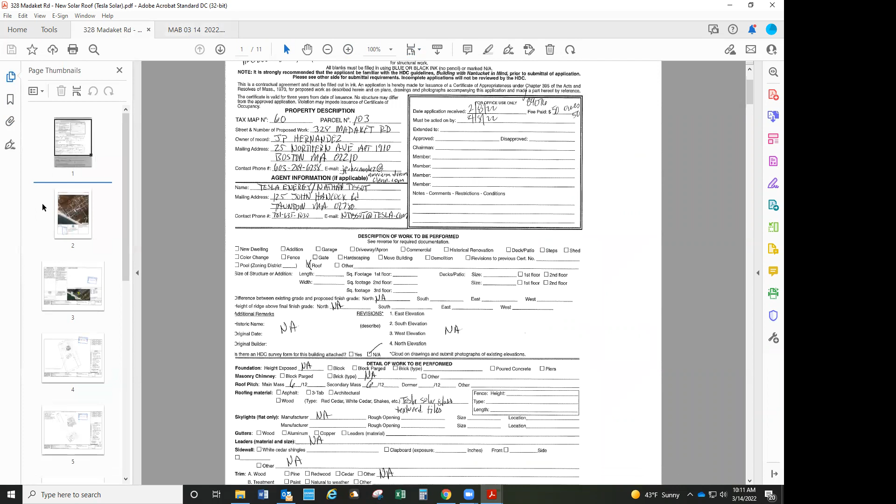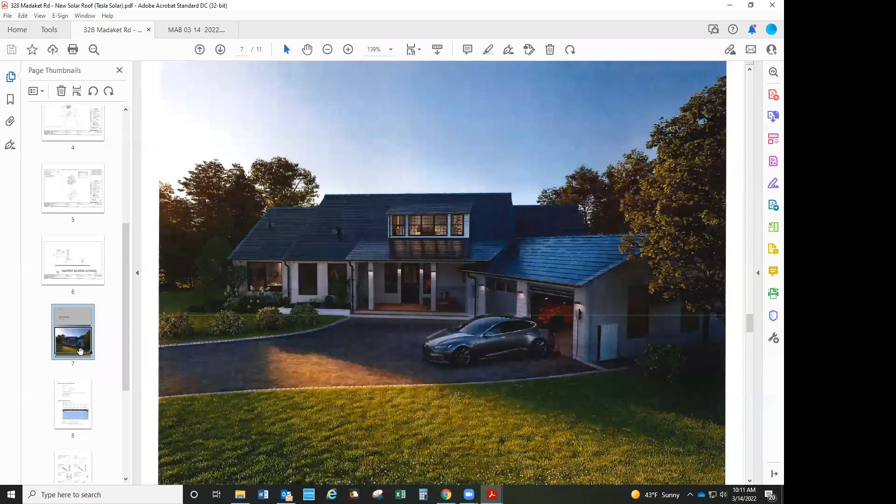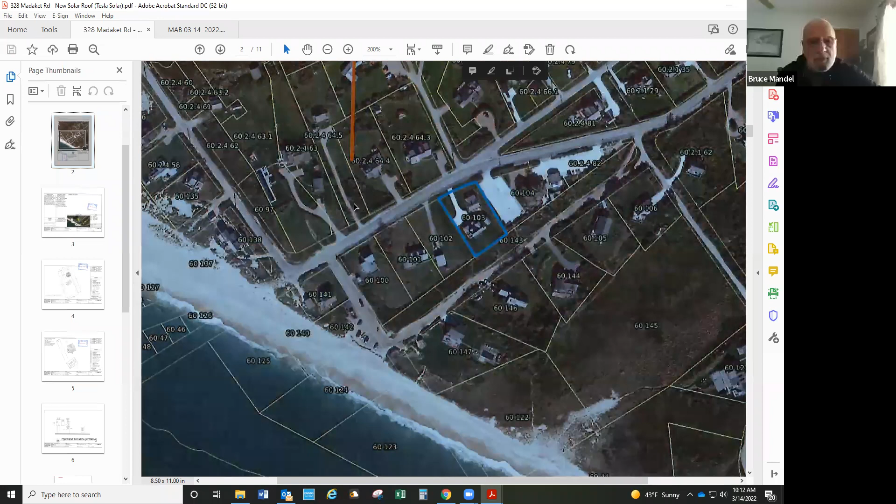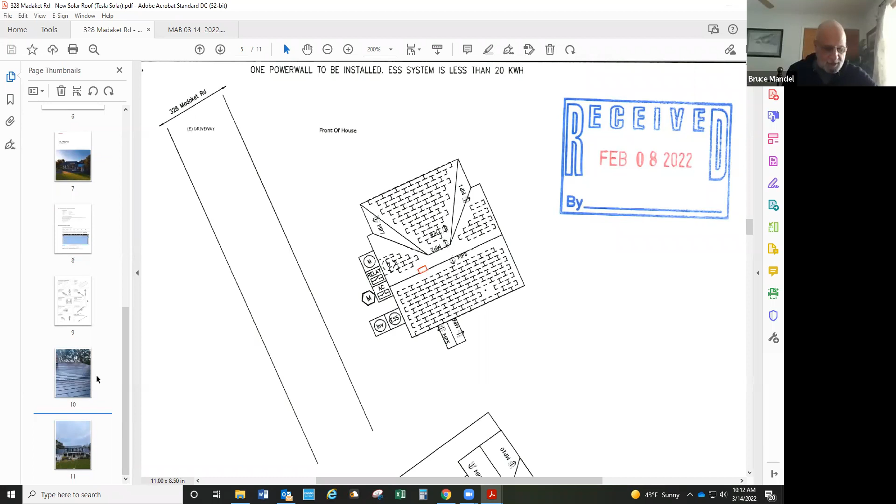I knew it was way out there. It's right next to Millie's. No, those are my clients. This is 2 doors away from Millie's. Oh, interesting, go to the site map. I did. I know this, go down, yeah, they're basically 3 doors down from me. I'm confused, site map, I'm on 328 Madaket Road. Okay, well, see the blue lot, you see that blue box? Oh, Millie's, I thought, because my clients are the ones across the street that owned Millie's. Okay, that Millie's big restaurant. Yeah, Millie's that restaurant. That white rectangular is Millie's parking lot. Yeah, I was just seeing, my head was going to Millie's Cottage, not Millie's Restaurant. I see, I'm sorry, I should have said restaurant. Okay, alright, what part of the building, I hate to ask, are these on? The roof, front building, according to the drawings, they're on the front building closest to the street. I have some questions, maybe let Nathan make the presentation first. I assume it's on every piece of this building, including what's facing Madaket Road, but let him, Tom is here now, let him have his shot at this.

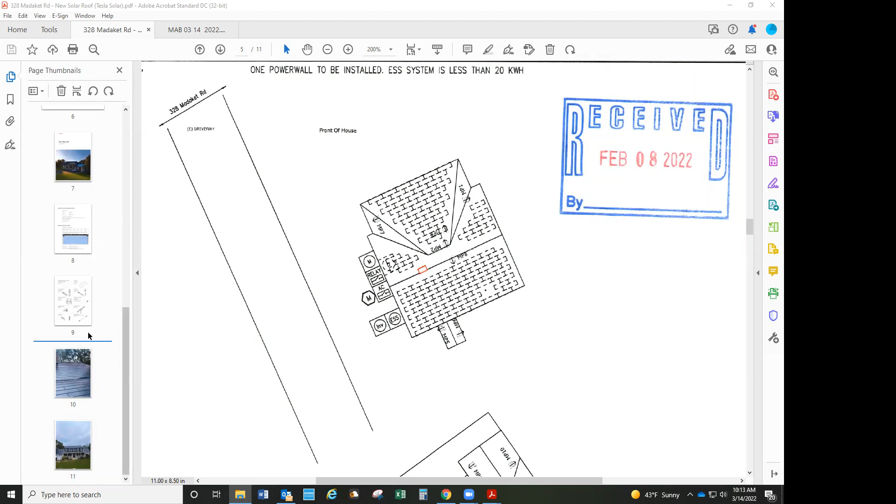Hi, thank you. Just to clarify, these are not solar panels, this is our new Tesla solar roof product. They're textured solar shingles that take the place of asphalt shingles. So in this case, if it were to be approved, the roof would be stripped and the solar shingles put on the house, just the front structure, because there's 2 houses on the property, the one closest to Madaket Road. On the second page of the plan set, the tiny squares you see would be active for solar energy, solar PV, and the rest of the house would have dummy shingles, but all the shingles match. Each shingle is black and textured, so it will resemble asphalt tiles.

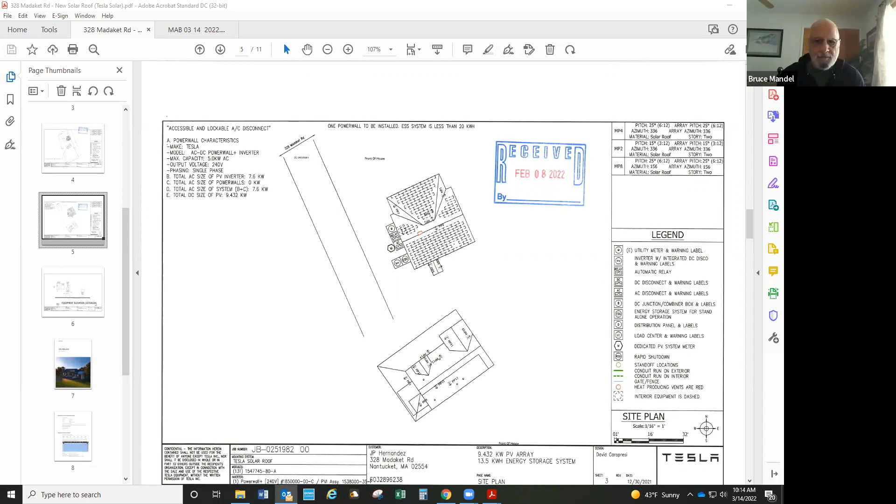I did send some pictures into Esmeralda as well. Well, that's what we're looking for, is the pictures. Okay, I thought I had saved them to this file, but I'm looking for them, so bear with me. Can we allow him to screen share? Of course, if he's capable, yes, more than happy to. Unfortunately I cannot, because I am on my cell phone and my laptop, there are work pictures on there. There are 2 pictures in the submission package, if you go to the end. He provided specifications with a couple of pictures.

Yeah, I'm just looking for one that steps back. I know what they look like on the roof. I mean, the only other ones on Nantucket were the Dow ones, and there's only one house with the Dow roof shingles that were 15 years old. That was my niece's, so I've seen those. These are a lot better, actually.

The picture, okay, there you go. That's actually in Sandwich, so that's what the roof would look like when completed. I have been approved in several historical districts: Provincetown, Yarmouth, Hingham, Cambridge, Sandwich. Any historic districts? Yeah, quite a few, we have installed in Yarmouth on Old Kings Highway. So you had to go through their board? Yes. And then I included a couple pictures to see what it would look like against typical cedar shake and then gray vinyl siding as well, two of the more common sidings on Cape and Islands.

Well, we don't have any fake siding, everything here is cedar clapboard or shake, cedar shakes, right, cedar shingles. Nathan, you made a statement that only one face of the roof would have these active shingles, the other would be inactive. Which face is going to have the active shingles, and do the active ones look like the inactive ones?

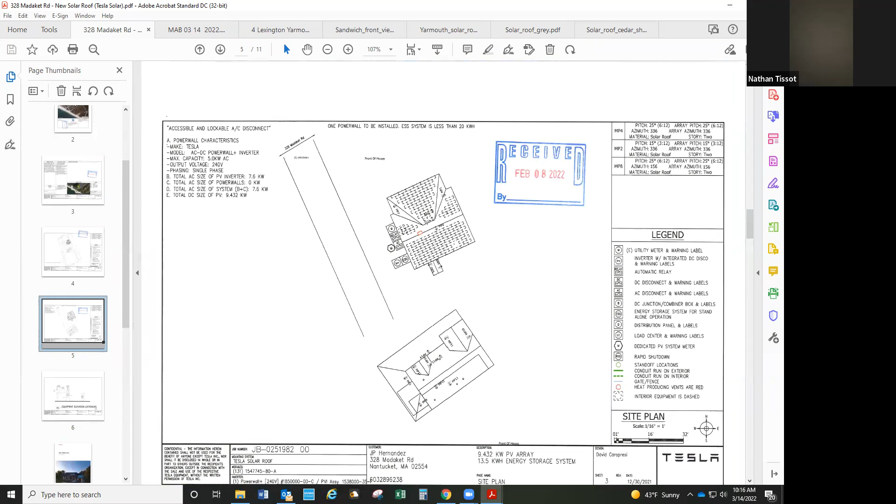So if we go back to the plan set, on the second page, in that first structure, there are little squares outlined on the roof. Those are all the active solar shingles. Every one of those squares represents an active shingle, on each of the four planes of the roof. The other blank spaces would be dummy shingles, but all the shingles look the same.

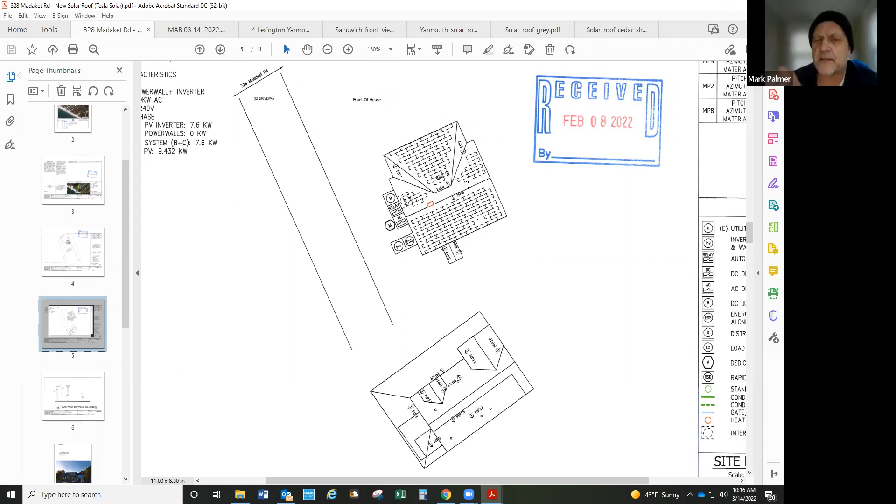Do you have a photo contrasting one of those shingles with an asphalt shingle? I believe the last picture does show active and inactive, so you can tell the difference. No, those I don't have any that show a side-by-side comparison to asphalt.

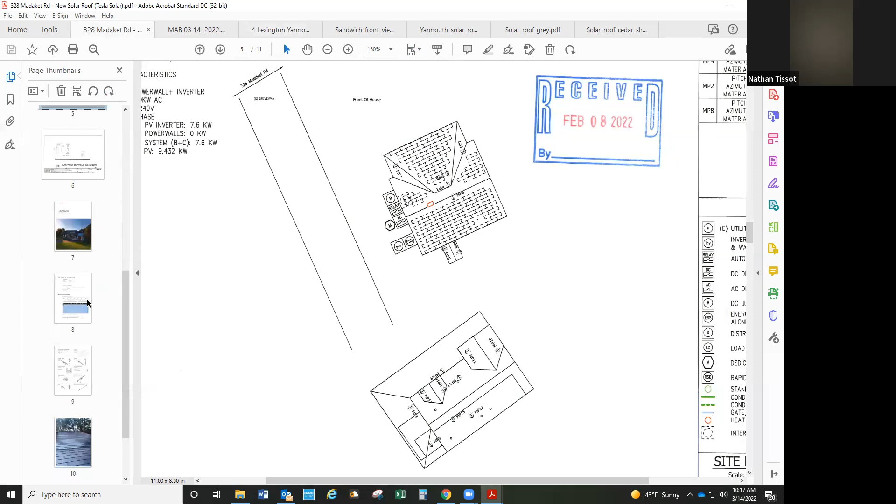Yeah, the other houses have asphalt. Maybe go to... hold on, everybody. Go to this last photograph. Everybody needs to stop, you got to talk one at a time, and I got to recognize you because I have to take notes, and I can't have five people talking at once.

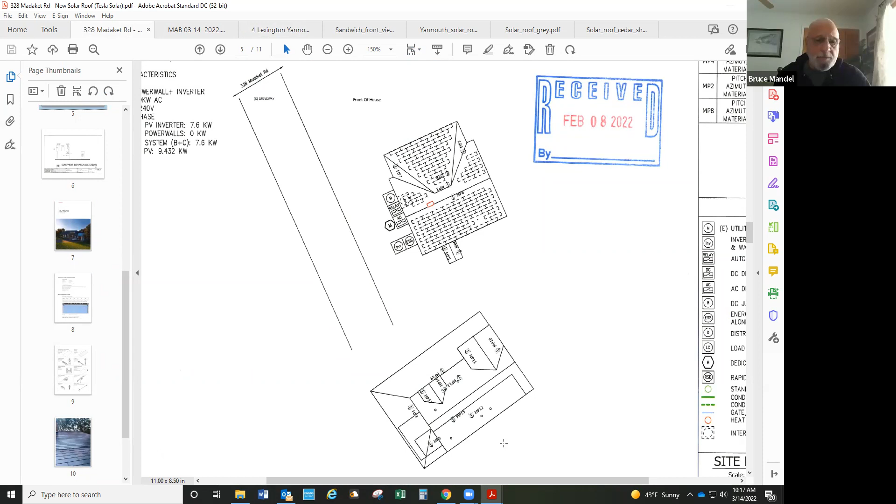So Bruce, you still going? Yes, go to the bottom picture that shows the view from a house from the street. I think it's the last picture of the packet. This one? No. Yes.

It looks like there are several types of shingles in this picture. One is a very shiny one right over the porch, and then the left and right areas look different from the main roof. Are all of those the shingles you're referring to?

So these are all the same shingle. The ones on top of the roof with the ladder at the very top, those are active. The one below that on the porch are inactive, but they are all the same shingle. I don't know if it's just the lighting making it look a little different, but they're all the same shingle.

The reason I'm asking is that in my experience, these shingles off island are very good, effective and efficient. I think they're a great idea, but they can be a little more shiny than a normal asphalt shingle when the sun is at a right angle.

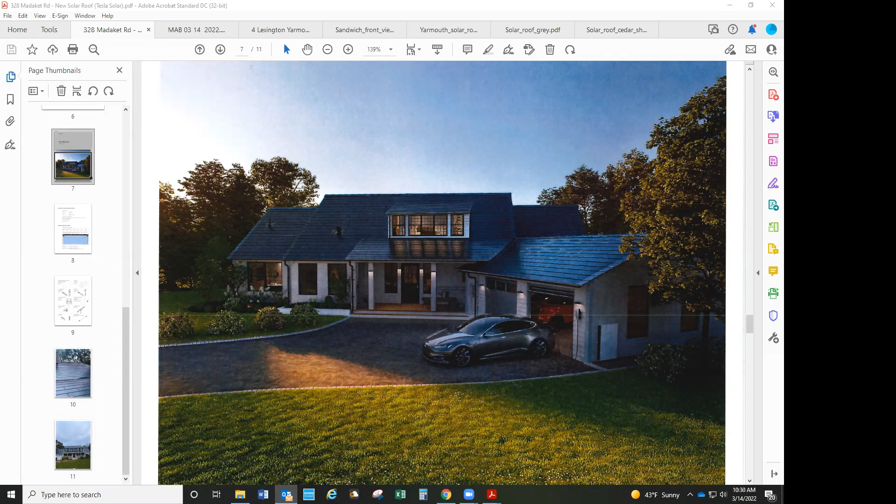Hold on, one person at a time. Nathan, do you have an answer to their longevity question? How long do these last and can they withstand this kind of crazy weather? So they are warranted for 25 years. Ideally, they would last 50 to 100 years. And that's also with degradation of the PV.

I know we have tested these pretty extensively, and a big concern was the New England area, so they did a lot of research there. We have installs up and down the coastline, and as far as I know, we have not had any issues. All the wiring is underneath the glass panels, so that's not exposed, and it's sealed just like it would be an asphalt roof. And it's hail rated at the highest hail rating, which I think is 5.

Yeah, we don't get hail here. We get wind, rain, and salt. Anybody else have any more comments? Well, just to add to that point, everything—if someone leaves a car there, the windows do get sandblasted, so these might get sandblasted possibly.

Would they still work? They would, because the PV is integrated into the tile. And I imagine the sandblasting would probably take away some of that shininess that the board would be concerned about. Just wanted to say that.

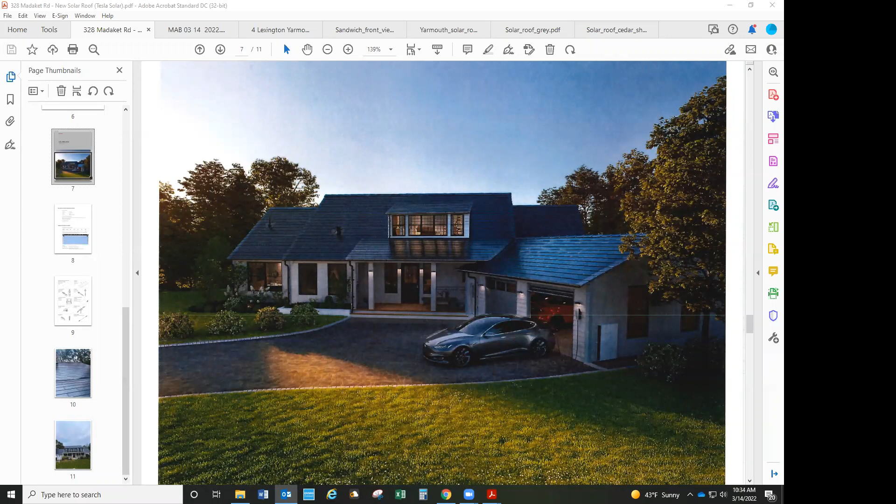I move that we record the opinion of the advisory board that it's a split decision, primarily based upon the shiny, out of character nature of these compared to what's in the rest of Madaket. And we also recommend that the side of the house with the various pieces of equipment should have a low fence so it's not visible from the street or bike path.

Yep, got it. Is there a second to that? I'll second it. Okay, Bruce, in favor? I'm in favor, yes. Tom, aye. Mark, aye. And myself. Okay, I will transmit that.

I'll hazard a guess, guys - if this goes forward and it works, I think we're going to see them all over the place. Just trying to avoid that extra cable and everything else that goes on here.

Okey dokey, thank you Nathan. Thank you very much for your time. I would suggest you be at the HDC meeting because this is going to come up. Yes.

All right, 265 Madaket Road. Okay, this is Brooke's - I don't think Brooke is here, though. He is not here. Okay, what do we have up first here? The new second dwelling, secondary dwelling, okay. Well, that's pretty innocuous. Do we happen to have a picture of the existing structure?

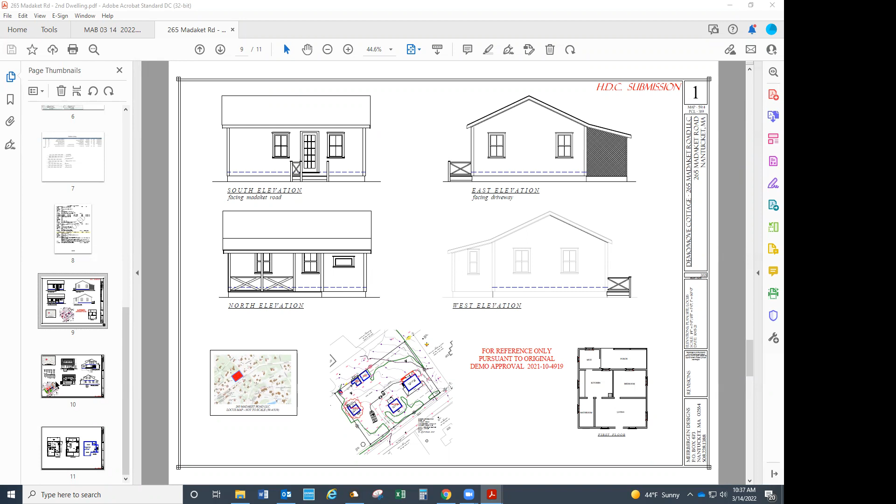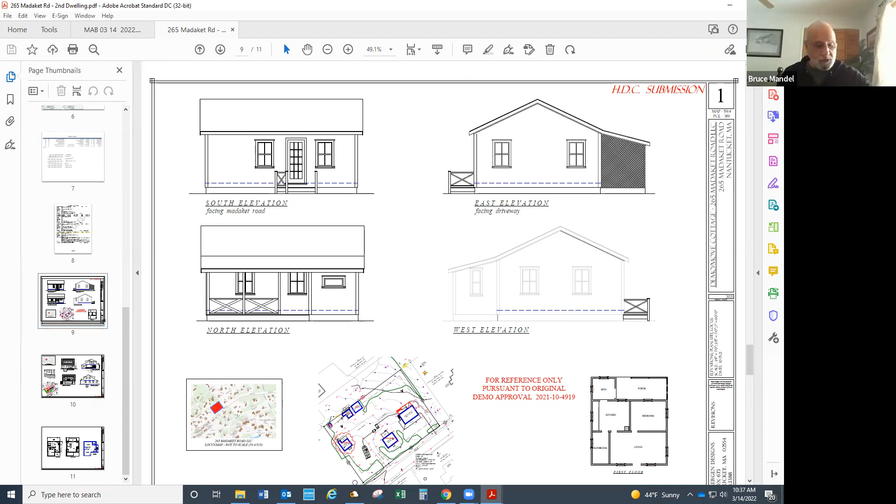I don't think that's the demolition. No, the first page is the demo of the structure that's coming out. How do you know that? Because it says it - demo, removed cottage. Oh, barn. Okay, so this is what they're replacing it with. But how do you know what the existing structure looks like? I think the existing structure is a fairly new structure, it's a regular center hall colonial with a wraparound porch. Porch, that's what I thought.

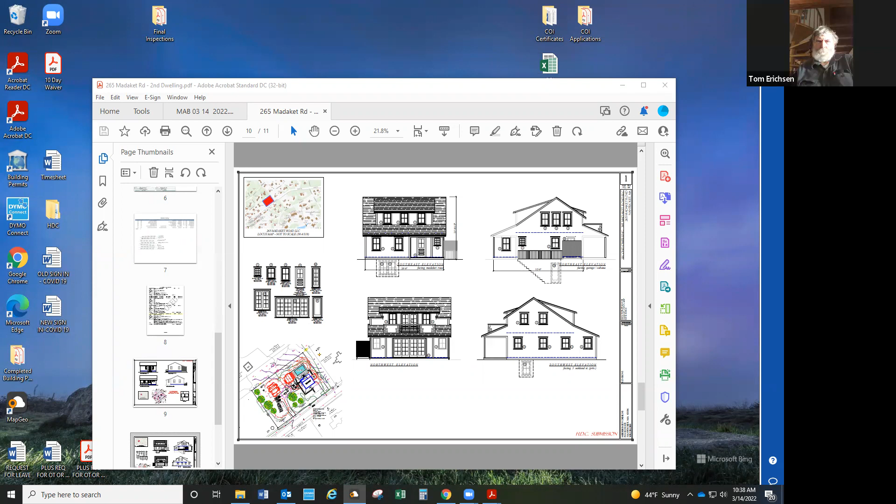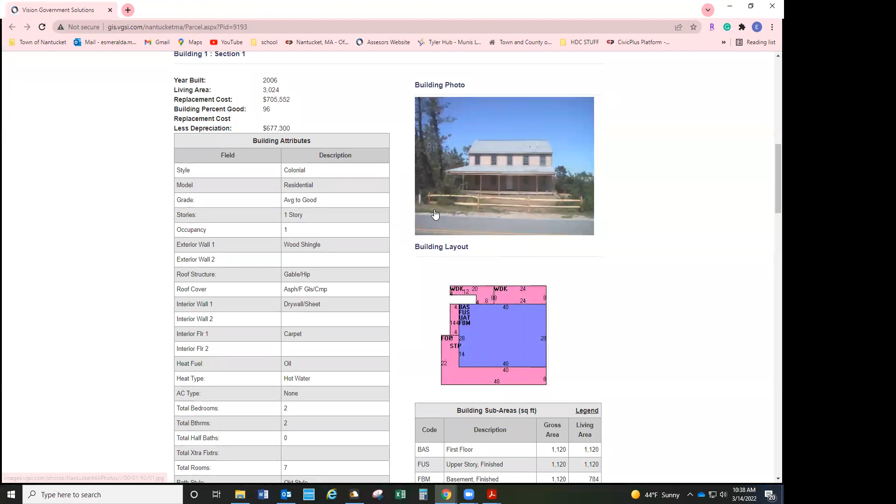Esmeralda, can you get to the GIS from here? That's what I'm trying to do. Otherwise I'll find it on my own. Well, that's the first problem. I don't know why, Esmeralda, you've got to start holding their feet to the fire - if they're going to have a secondary dwelling, then they really need to show you what the existing structure looks like. Understood.

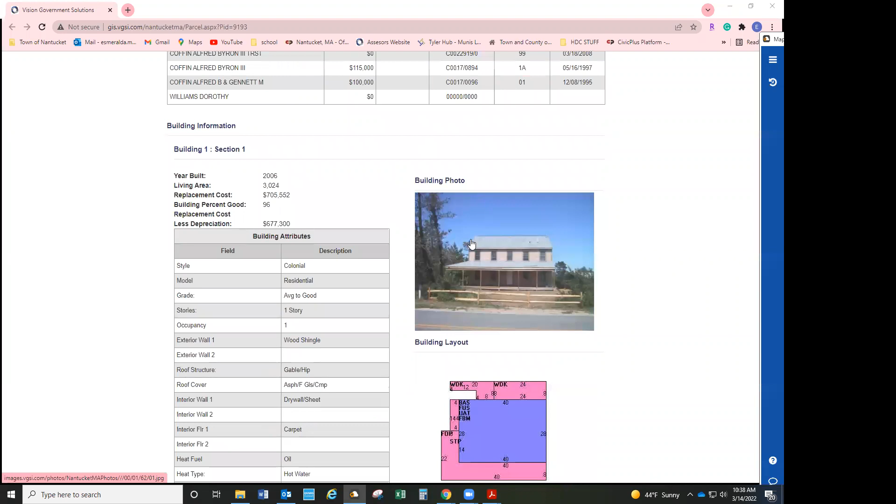And we've had this - that was part of what we were trying to require a long time ago. You have to go to the property record card, which is on the left. That is a property record card. This one. No, I've got the picture here. I'm going to copy the image and send it to you. Okay.

That's what I thought this house was. Okay, now, that's a street view - hold on, I'm sending it to you. Okay. Oh yeah, there it is. You got it up - that's what I thought. They just built this house, I don't know when, but not too long ago - 2006, it says.

Okay, so this is going behind this structure, I hope. There's no other room.

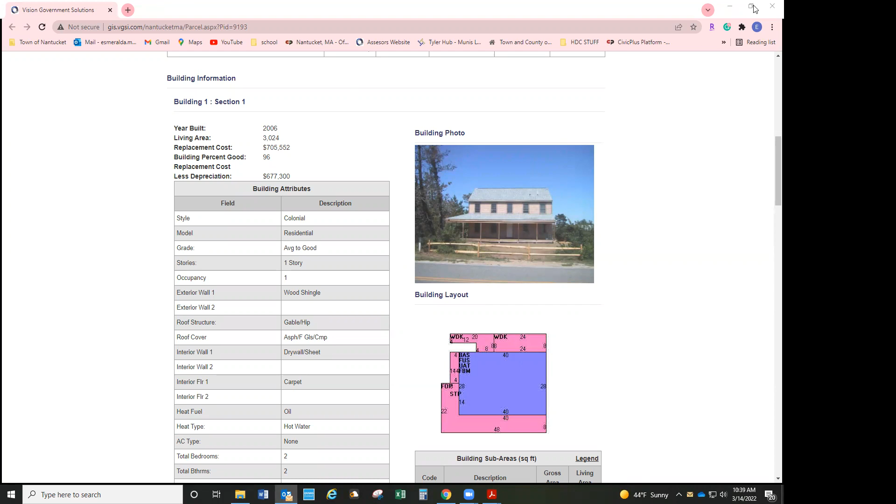To the left of the existing house, right on the street, there's a barn and that's the demo. And then behind that, to the left in the back, is a cottage demo.

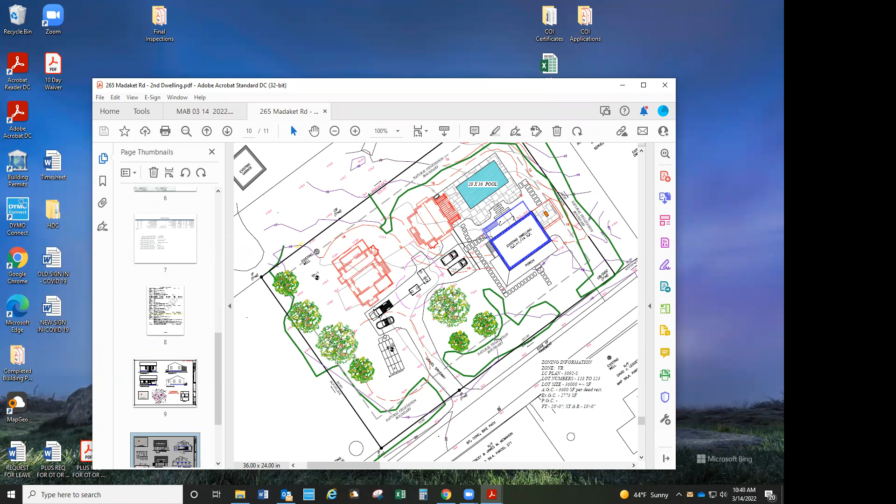You can't have 3 dwellings on this property, so I assume one building is... we'll get that next, I guess. Alright, let's go back to the garage. It's a garage. Let's go back to the cottage.

You already got it highlighted down here. Okay. I don't see anything to write home about. That's in the rear of the property and it doesn't look that bad. No, it's not that different from the front house, because what you see from the road is that front porch, like the other one.

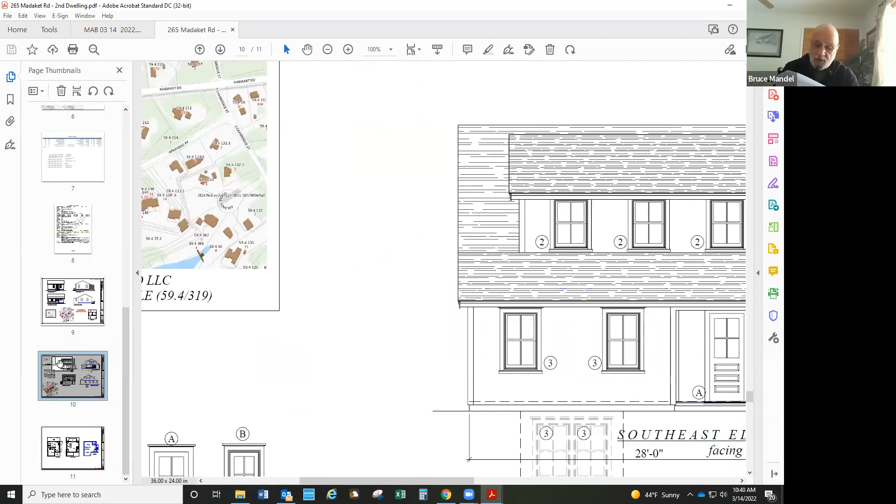Shouldn't there be at least some dimensions on this drawing? I mean, it shows the height. They do, I just can't read it. It's on the right side. Yeah, it shows the height is 21 feet 8.5 inches, which is fine, plus another 6 inches or so for the foundation. And it's got 28 feet wide.

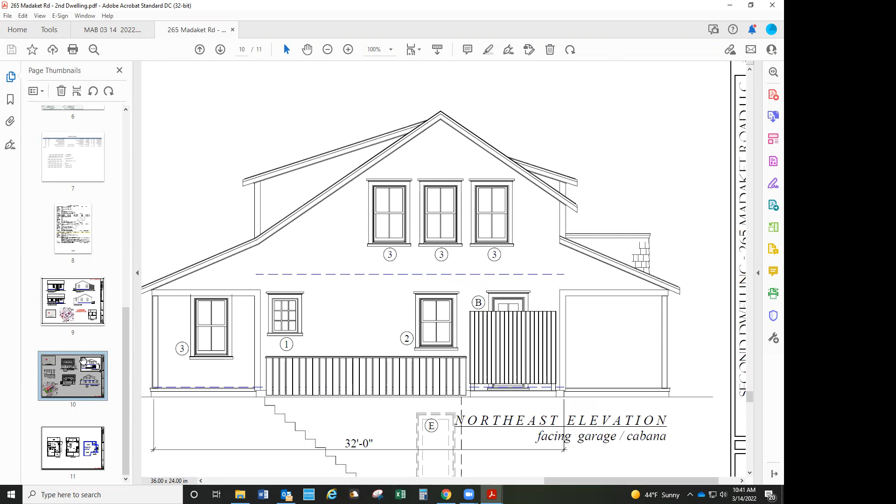And what's the side view, Esmeralda? Well, that's including the porch, I would assume. No, 32 by 28. It's got the right height. It's got a broken back.

The only thing I can see that's really irritating is on the northwest - those French doors aren't working at all, as far as the pattern. They shouldn't be 8 lights. The panes are weird. I know they're sliders, but I don't know what happened to the panes.

But I have a question, Linda. In the minutes of the HDC for November 9th - I think it's included in the package - it says the HDC already approved this project through staff with submission of supplemental information, and these drawings are referenced in the application. So I believe that's the demo, is it not, Esmeralda? Is this a brand new structure we're looking at? Correct, this is a brand new structure, and I think the minutes refer to the demo.

Demo, okay, thank you. Yeah, it's a moved demo of the cottage. They have to advertise it before they can demo it. Somebody will take it, I see. The only things I can see is the sliding doors - the panes are odd - and the baluster up there has wire.

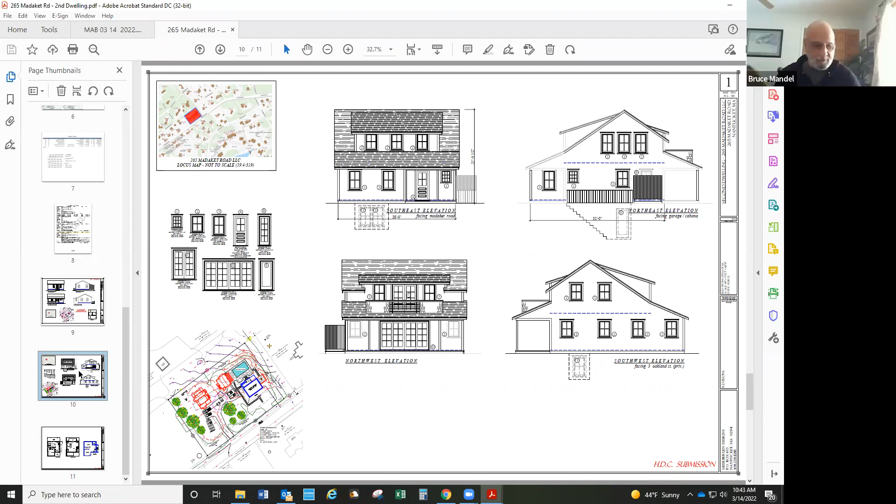It's off the street. That's the only way they're gonna keep this height at 21 feet, is to have a shed dormer that's basically a flush dormer. There's weird dormers all over Nantucket, so... Yeah, I just think the pitch of the one on the northwest is a little flat. That's what he's missing - he's missing the pitches.

Esmeralda, go back to the application page for a second. What does he have for pitch on these dormers? Oh, he doesn't actually have the pitch on the dormers. Well, he's got 5 over 12 for covered porches and 8 over 12 on the main mass. But he's supposed to have the dormer filled in - he doesn't have the dormers filled in. Oh yeah, I see that, it's blank. Okay, so that's my only problem - the northwest dormer is a little flat pitched.

I'll make that as a note. Otherwise I don't see any other issues with it. So there's really no other concerns, Mark? I have no others. Tom, yep, I got you. Mark, anything else? No concerns. Bruce, okay.

Alright, okay, somebody make that motion that we put that notation in there, and note the picture of the existing structure. So moved. Okay, who was that? Is that Mark? Is that Bruce? Yes. Okay, is there a second? Second, Mark. Okay, all those in favor - Bruce? Yes. Mark, yes, aye. Tom, yes. Okay, alright, what's next?

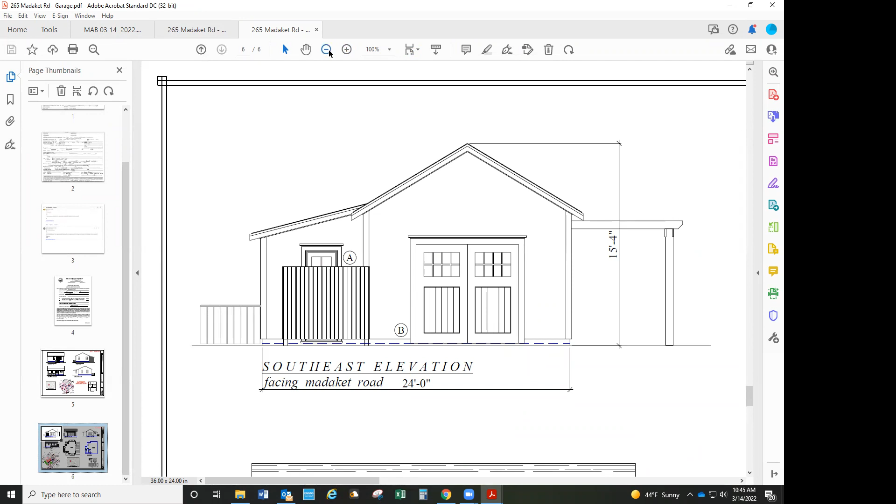Like so many, everybody's putting something in the basement. This is kind of a corporate, short-term rental, so maximizing as much as they can. I don't see anything wrong with this.

Anybody else have concerns with this? Other than that, it would be nice if there were some dimensions we could reference, but he has them. It's 28 by 24 on the drawings.

In the past, Linda, you've complained about things like there's no cardinal directions, not enough dimensions on this thing, but no, he's got the cardinal points and he has dimensions. It's 24 by 28.

On the right, if you look at the southeast, up on the upper left corner, he's got the height and the width.

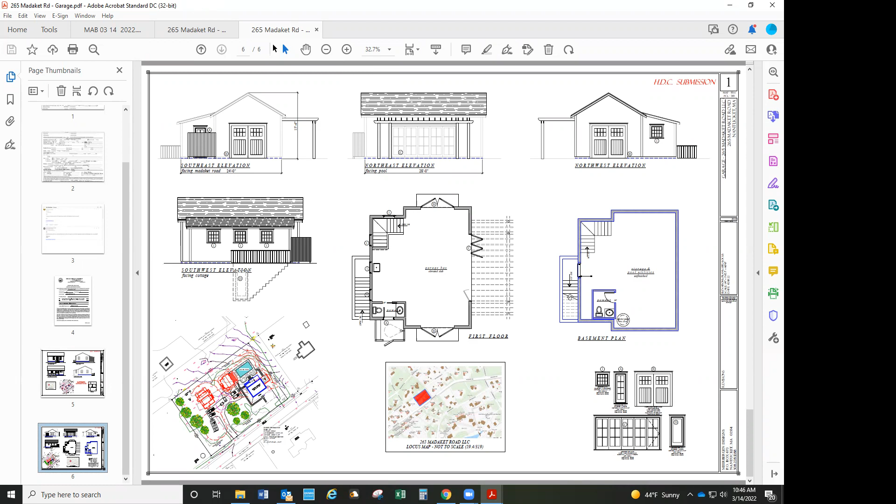What he doesn't have again are the pitches. It's fine, but he doesn't have any pitches on the drawings. Are the pitches shown on the application?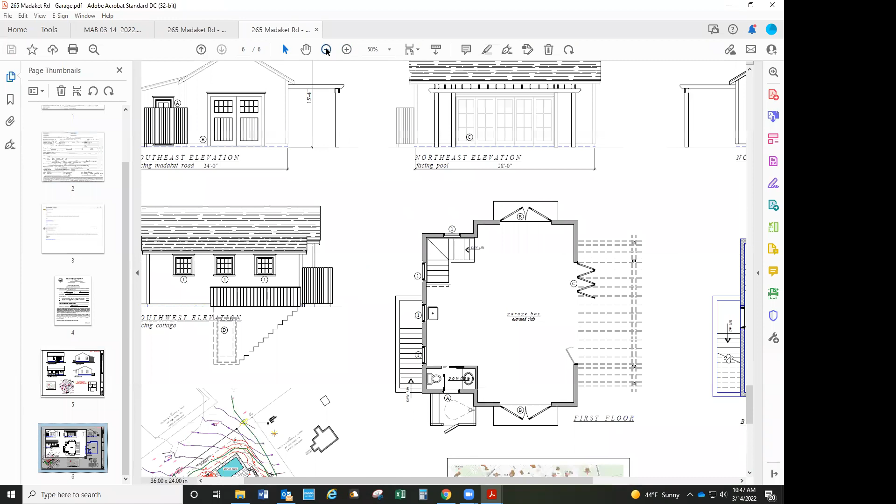8 and 12, and 3 and 12 - I don't know what that is. 3 and 12 is a little too low. I don't know how he's gonna fix that and keep this thing small, but I think 3 and 12 is a really low pitch, though not unusual for Nantucket.

But he's got to put the pitches on the drawings. They're required to be on the drawings, so you don't have to go back and forth repeatedly. I'll make that note and call Brooke and say, you got to get a grip here.

And a picture of the main structure. Okay, somebody make that motion. I can make that motion. That's Tom, and Mark, you're doing your usual second. Second. Tom in favor, yes. Mark in favor, yes. Bruce in favor, yes. I'm in favor.

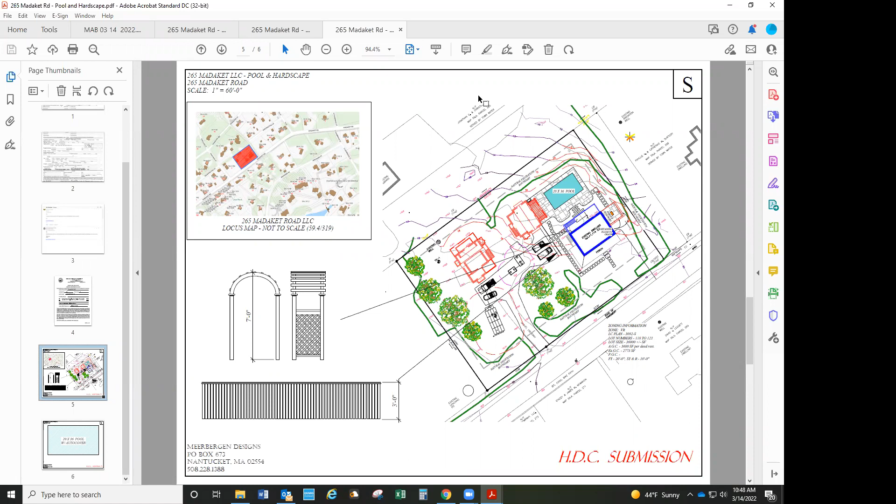The next thing is a pool. I know it's a big enough lot because I had a client fairly close to this a couple weeks ago when they got the notice, and they wanted to know what was happening, so we checked the lot size. It's over 7,500 square feet, or whatever it has to be, 10,000 square feet or whatever.

Okay, pool. Not very big - it's a big pool. No, it's not, 20 by 36 is one of the smaller pools. Well, that's still about average size, not large but not small. I've been dealing with 20 by 42s a lot lately, and I had one that was 66 feet long. Go figure, what are you doing in that pool?

Provided it's not visible from the street - anybody got any problems? Well, it is visible from Madaket Road. I have some questions and maybe you could help me with them.

First of all, the drawings don't show a fence around it. They don't need a fence anymore if they have an automatic pool cover. Esmeralda, do they have an automatic pool cover? Yes, it says it does, but the state regulation still calls for a 4-foot-high fence around it, with no exception. No, it doesn't anymore - it used to be a 4-foot fence, but it does not require a fence under the code anymore if it's got an automatic pool cover.

I do enough of these. So no, it does not require it, and before it was 4 foot and could be wire and hedge.

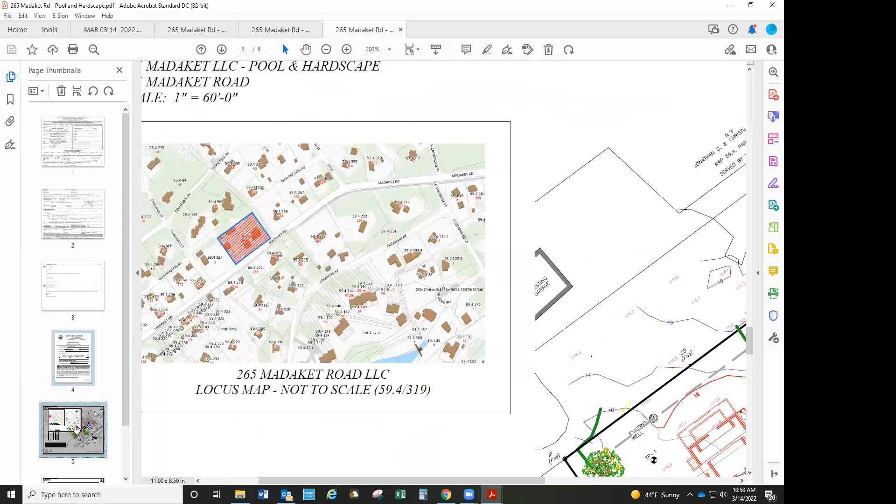Shouldn't there be an indication of where the pool equipment is, and an enclosure for it, at least to soundproof it? Yeah, you might as well go back to the site plan again, Esmeralda, and see if we can find the pool equipment - I didn't notice it offhand. Oh, you know where it is? It's in the basement, that's why there's a walk-down. It's in the basement of the cabana.

That's where I'm putting all mine. That's where everybody else is putting theirs. What do you mean the cabana? The garage, yeah.

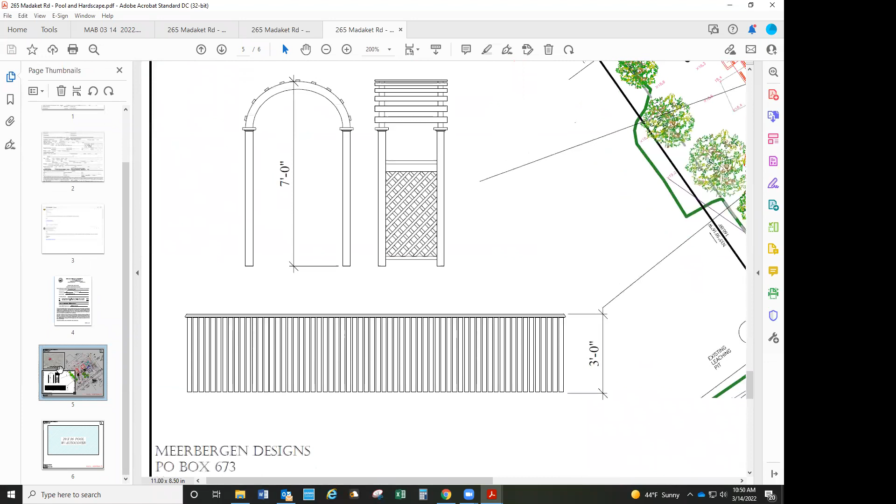We have to have that indicated though, so I will put down, where's the pool equipment - basement? I'm looking at the basement plan of that building and it doesn't show anything about equipment there, just a bathroom. No, they're not required to do that, but we are required to ask the question and they have to come up with an answer. So that's where that's going.

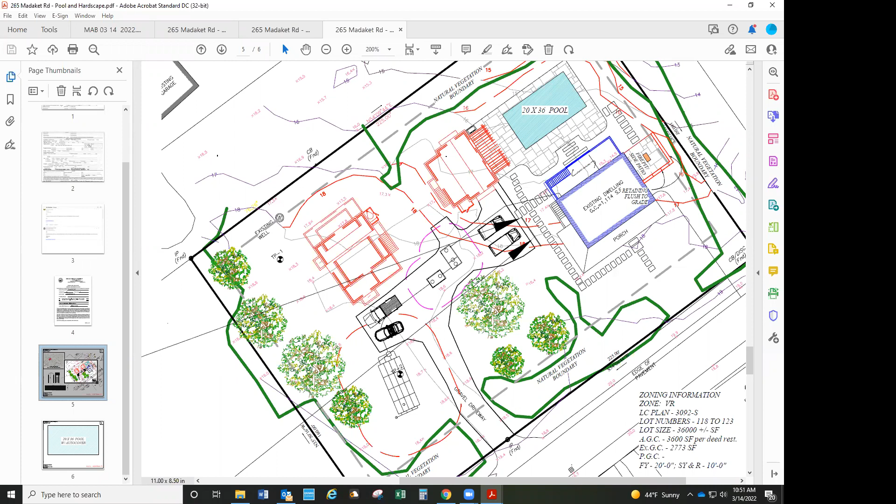So if it's outside, I guess it would require an enclosure. Yeah, or somewhere where it's not seen - so that's the question we ask. Tom, even though it's in the rear of the property, do you think we should still have a row of bushes in front of it? I think we should note it's actually required for a pool in Nantucket that it be properly screened, and I don't see a screening plan. Do you? No.

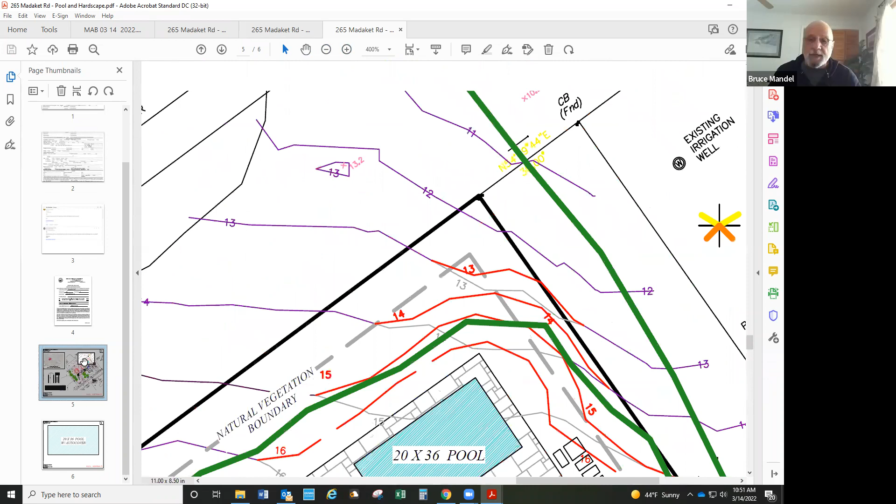Okay, the only other thing they're saying is it's got natural vegetation, the notation there. Can you blow it up a little bit? Well, that isn't going to work. That was one of my comments - shouldn't it be some kind of evergreen, indigenous vegetation? Esmeralda, can you move it to the left a little bit? I like it blown up, but there we go.

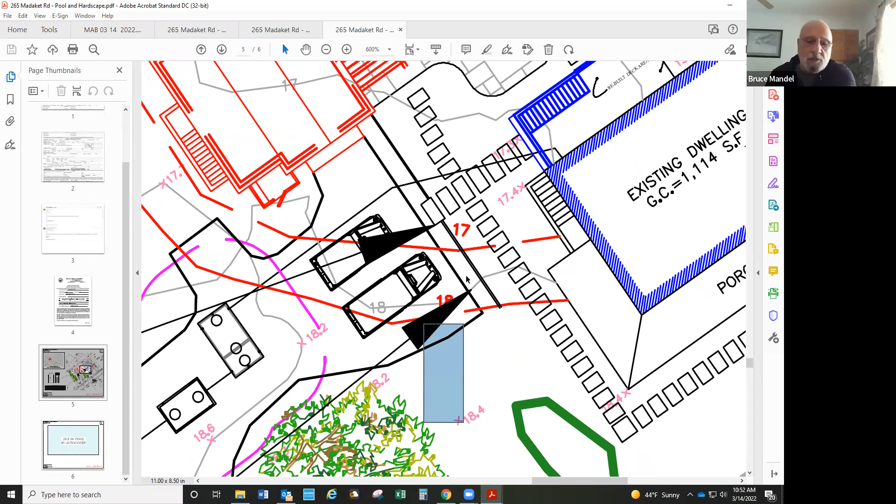Where's the fence, by the way? Does anybody see where the fence is? It runs along the front of the driveway, on both sides where those cars are parked, and there's a kind of arbor there. You see the notation's off the page - that's the problem. Right there, that dark black line, that's the fence. Yeah, I got it, but that notation with the little arrows goes off the page, we can't see it. All right, the only other problem we have here is the lack of adequate screening plan.

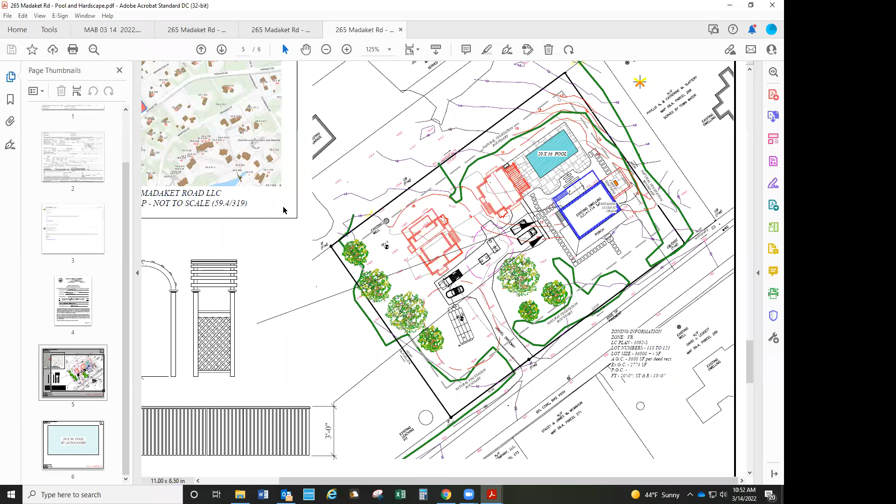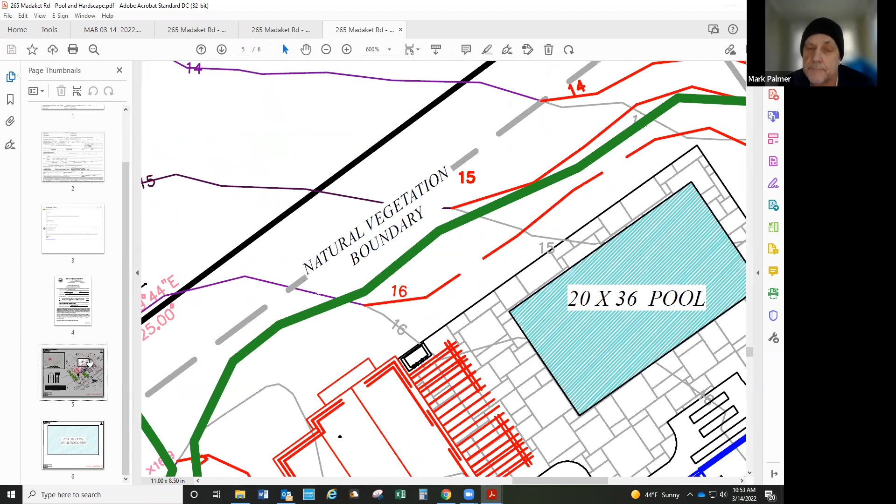If you look to the side of the building, guys, what do you see on the right side of that building? Something that should not be there. Are you talking about that little red enclosure? Yes. Can you make that a little bigger? There's some writing there that's hard to see. It's a fire pit. And it's on the side of the building.

Does anybody else have an issue here? I just have about the screening. I have a problem with the fire pit, period - on the side, next to the shingling, that's ridiculous. Well, I don't care if they burn their house down. My problem is they shouldn't have a fire pit and a patio.

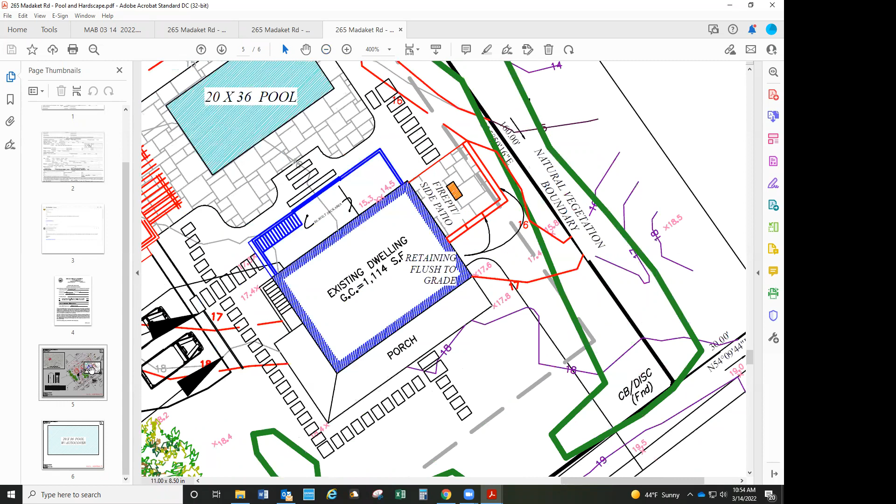Esmeralda, do you have any idea what that red line is there? It says retaining, flush to grade. What does that mean? They're putting some bluestone patios there, and I think they meet there. There's a slight grade difference - you can see it goes from 19 to 17. So I think they've got a little sunken retaining patio. Is it sunken? It must be a sunken patio then. It might be, it doesn't say.

Well, I don't think it should be on the side of the building at all. I don't like fire pits, but I'm not going to tell you you can't have one, but it should not be on the side of the damn building, flush and open to the street. It's completely visible to the street. There's a 2-foot drop there, they're regrading that whole area - you see the red elevations. It's going from 17'6" at the corner of the building down to about 15 and a half feet by that fire pit, so it's about a 2-foot drop.

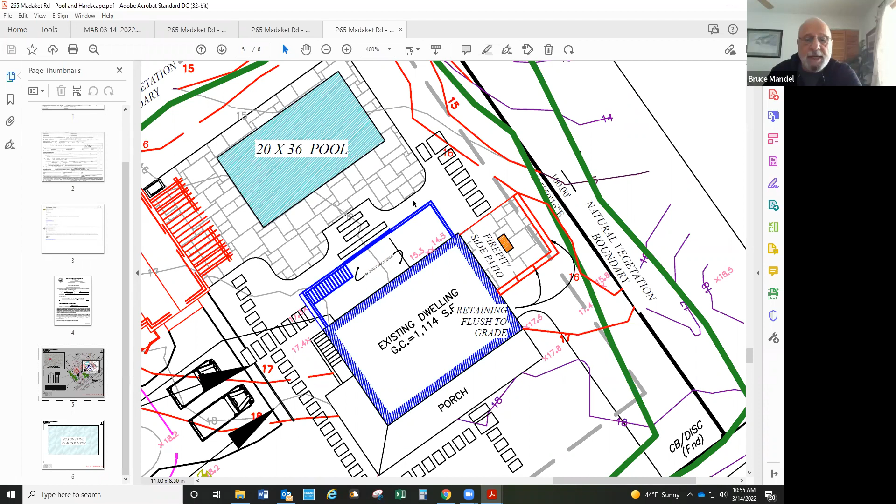So I believe they're building a little retaining wall and a patio there with a fire pit. I don't care what they're doing there, it shouldn't be on the right side of the house, which is completely visible from the road. Does anybody else have a problem with that? Well, I do, Bruce does. But they're indicating with the big bold green lines that they're indicating natural vegetation hiding it. That can disappear tomorrow, as you know. That's why I was saying there ought to be a fence around these types of things, but maybe they could find a better location where it's not so visible.

Yeah, I mean, put it somewhere else. I've seldom seen this type of situation where it's off to the side of a house, ever. Usually they put it back near the pool - maybe they could put it somewhere else, like between the pool and the garage. Yeah, somewhere other than there, unless they screen the crap out of it or put a fence over there. Or behind the pool. Yeah, somewhere else. It can be in the setback, but not everybody's going to do that.

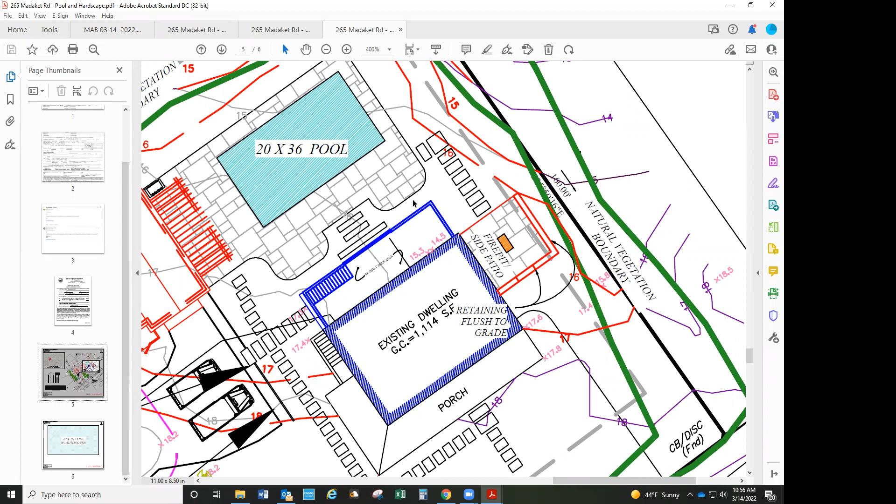But does everybody agree with these comments? Tom? Yes. Okay, I'll make that - somebody make that motion. I put those comments in. I can make the motion. Tom, I assume second - Mark's got the second. All those in favor: Bruce, yes. Mark, aye. Tom, yes. Myself, okay.